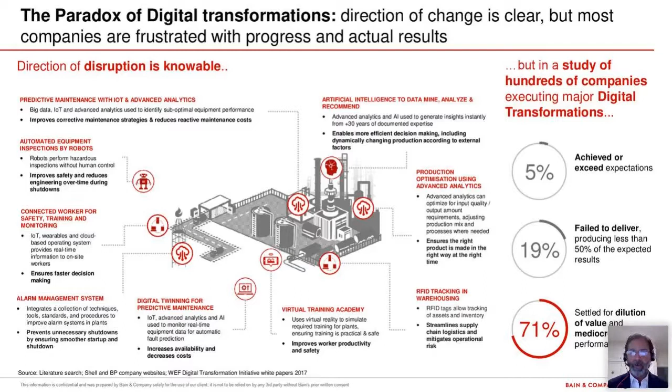But going now to digital transformations, I think the very important thing about digital transformations is the amount of frustration there is among the majority of users. Because when we look at what are the use cases, I think we've known the use cases and what could be applied to the downstream sector for more than 5 years. Right? Things like predictive maintenance, automation, digital twinning, all that. But when it comes to execution, the vast majority of digital transformations have generated a lot of frustration. And why is that? And what is different about the cases that we're going to see today?

I think that the key thing here is a lot of companies, as opposed to having a strategy enabled by digital, started a digital strategy. So it was about digital for digital, and embracing a number of use cases at the same time without a clear notion of a program. And that resulted in solutions that, for example, worked in one refinery but didn't work in another. All sorts of problems in relation to using all the data that was available, because they came in different formats and didn't interconnect and communicate with each other.

And the most successful digital transformations that we saw, this is an actual example for a client. The most successful ones were the ones that started with the company's business agenda. Right. So what was important for the company in terms of its leadership and differentiation in the sector, and specifically within the industrial and refining realm, it started from operational excellence. So striving to achieve operational excellence and knowing what was important inside operational excellence is slowly but surely embedding digital into that. So having digital as an enabler of operational excellence and best-in-class performance, eventually driving to full digital transformation, right?

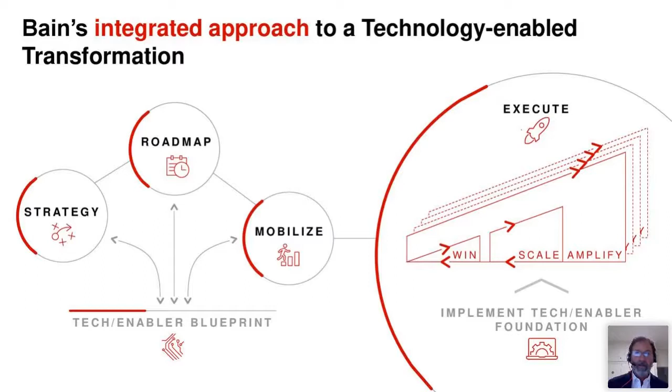So now I'll invite Ahmed Al-Zarani to talk a little bit about his experience in SATORP. Ahmed, floor is yours. Thank you, Josette. Thank you. Can we switch presentations here?

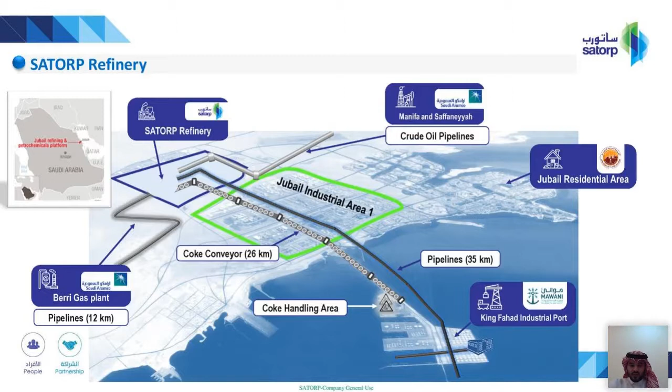So SATORP is a smart world-class refinery located in Jubail Industrial Area, Eastern Province of Saudi Arabia. It's a global partnership between Saudi Aramco and Total. SATORP is processing 460 kbd of heavy Arabian crude, full conversion integrated with petrochemical, high-value products complying with the most stringent international specifications. The SATORP complex contains more than 5,000 assets, 2,000 pipeline circuits, and 6,000 safety valves.

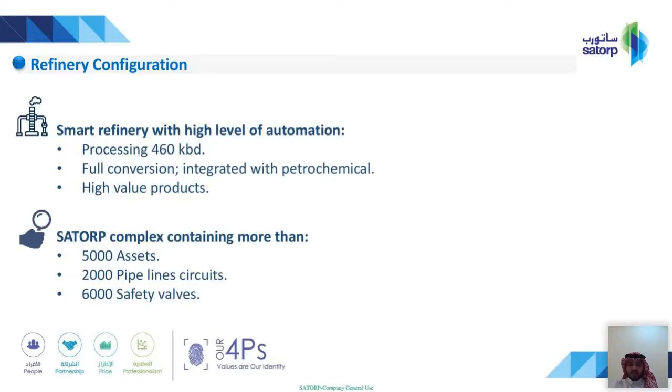SATORP digital transformation objectives are improving SATORP performance and agility to adapt to faster changes and sustain digital transformation, keeping SATORP an attractive and leading refinery. And the SATORP digital transformation guideline is to have full cyber governance. Digital transformation will contribute to improving employees and community, environment, health and safety, evaluation and growth, excellence and resilience, which is plant integrity, which we will discuss more in this presentation. It's the main body of this presentation.

Building the 3D platform: SATORP adopted digitalization since the construction phase, where all the construction engineering documents, 3D CAD systems, P&IDs, instrument data, drawings were submitted as digitalized documents, and this is what we call a golden opportunity to transfer it to one 3D asset virtualization platform. The beneficiaries of this platform are operations, HSSE, health, safety, security, and environment, maintenance, process engineering, and inspection.

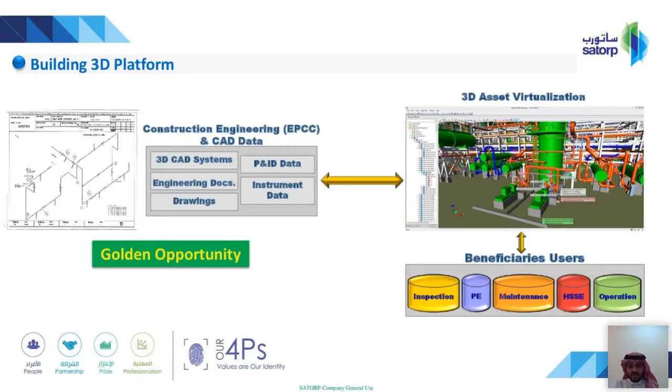Since my home department is inspection, I would like to give just an example of how we are using this platform. The first thing is the placement and managing of corrosion monitoring locations.

I think it's not working, so I will just go manually to the last slide. Sorry for that, I think it's not working here.

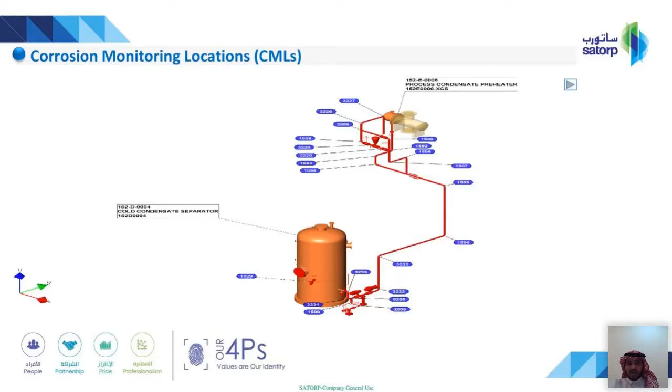So as you can see, this is a piping circuit, or what we call the corrosion loop, and this is the connected equipment. So this blue point or number is the CML, or what we call the corrosion monitoring location, where we take thickness frequently to monitor and see if there is any metal loss. So we are using this platform to identify all the thickness monitoring locations in all our corrosion loops and all our assets.

Sorry, again, the PowerPoint is not working, but I'll go quickly to the last slide.

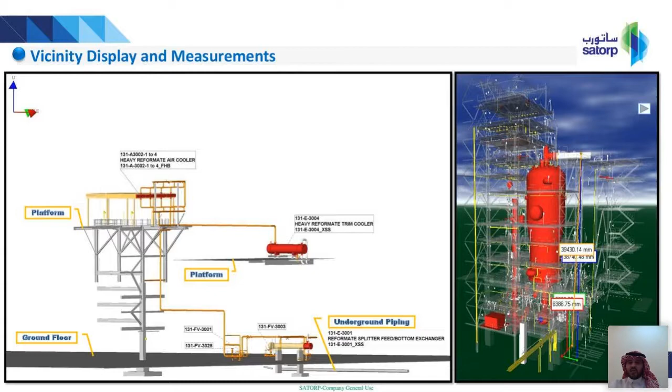So as you can see here, we also have the ability to overview all the assets and underground piping, even if the piping has insulation or not. We can also see the vicinity of the equipment. For example, if we have an inspection scope in a certain location on a nozzle, we will be able to identify how far it is from the ground level, whether there is any platform nearby, or whether we need, for example, support to get scaffolding or insulation removal.

So 3D laser scanning technology is nothing but converting an actual database of the assets and the plant configuration from the field data; we capture this field data to convert it to an active model. And this is what we call process digitalization. It's simply a mirror of reality.

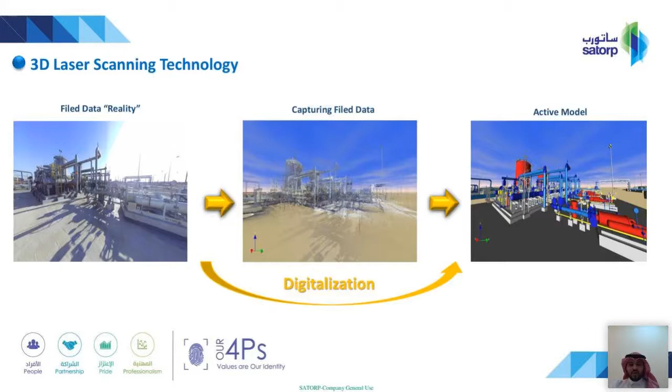Integration of the 3D scanning technology and fitness for service. But first, what is fitness for service? As a proactive measure and industry best practice, any critical findings or anticipated failures need to be addressed in order to evaluate and mitigate the risk. One of these measures is to conduct a fitness for service approach.

So recently, we faced two critical findings. The first one was a bulged regenerator. The challenge here was that the bulging area was all over the regenerator, not in a localized location. The second challenge we had is access, because not all areas have a platform, and as you can see, in some of the areas we have instrument connections or nozzles. And this leads to the incompetence of conventional techniques.

So, thinking out of the box, what we did is we made the 3D model, and we combined the 3D model of reality with the original 3D point cloud we have. After we combined them, we were able to compare and measure the length, width, and depth of the bulging area. These data are considered essential input for the fitness for service approach.

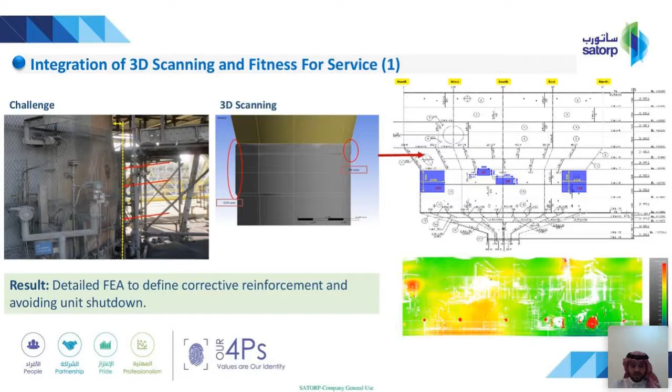Second case, it was about buckled piping. It's a 48-inch piping. The challenge we faced here to get a measurement of this buckle to go for fitness for service was the congested area. That led us not to go through a conventional technique of taking measurements. So we had to go through the 3D scanning technology, and as you can see here, we had a different section of the bulge location. The one in the green circle is the standard piping, and the one in white here is our current condition, where we'll be able to measure the ovality of the piping.

So this was during turnaround, and during turnaround or shutdowns, you need to have swift feedback, and you need to make a decision with quality and confidence, either to replace it or not. And after we go for fitness for service, with this approach, we will be able to take a decision to replace the line during the shutdown.

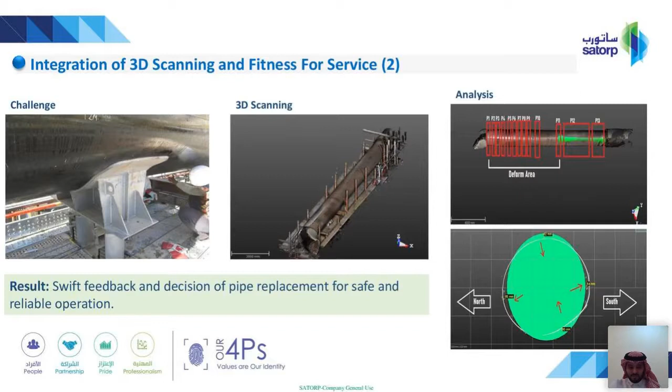The utilization of digitalized technologies will improve the asset evaluation. It will increase the plant integrity. And this point, as I just showed you, where we were able to evaluate the condition of the regenerator and the 48-inch pipe and other cases as well. In this case, also you will optimize your inspection monitoring cost, because you will have a specific location where you will take, for example, thickness measurement locations with the CMLs. It will give you an overall view of your corrosion loop and assets, and not necessarily to go, for example, to scan the full corrosion loop, as well as effective document communications.

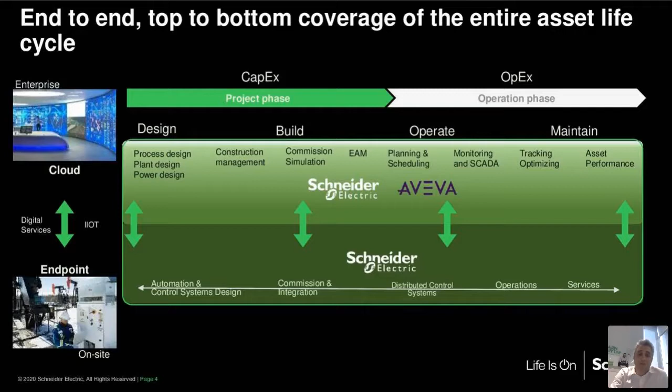Once I've spoken about these silos and integrations, let's take a further zoom on an asset, or look at this distillation unit, or its digital twin. On one side, we have the process automation and control systems connected to different transmitters, driving the performance of the unit or the overall asset. On the other side, we have the power system, which energizes all the actuators, be it pumps, motors, or other units.

Both are closely related, because the process drives decisions on the speed of the motor, on the flow, on the torque needed, etc. But yet, when we design a project, when we implement a project, the power and process disciplines remain quite separate. We strongly believe that to reach the next level of efficiency and unveil further synergies, the oil and gas industry needs to break the silo and integrate power and process more, because they cannot be looked at separately.

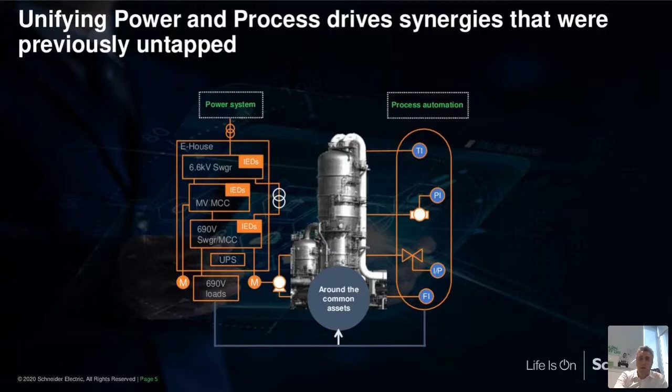Once we've looked at this, we'd be mainly addressing five areas of benefit coming from the integration of power and process. We won't be looking at them separately. Will the best CapEx drive the most optimized OpEx for an asset? Or if I design the most optimized OpEx, am I sure to drive an acceptable CapEx for my company? Or should I be looking more towards my total expenditure cost, and what areas would I like to drive through the integration of power and process?

And these areas can be summarized into 5 buckets, I would say. The first bucket the industry has to look at is how to maximize the efficiency around capital projects.

By unifying the process models and the plant models life cycle into a digital environment, and Ahmed has touched on part of this through his digitization example, the industry is capable to mitigate the investment risk and drive a more efficient capital cost by driving reductions up to 20%. By looking at asset reliability and performance, the industry would look at increasing the uptime and ensuring that no unplanned shutdowns are occurring or hitting the production.

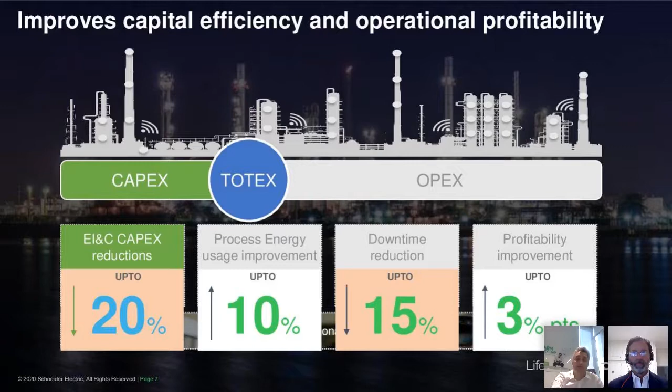I would like to pause here, and I see that the animation is not working. That's a well-loaded slide in my opinion.

But in order to drive performance today, we have streamlined 8 integrated power and process strategies, ranging from unified engineering asset information, so how to digitize information, how an end-to-end integration of conceptual feed, detailed design into an overall environment that handles process simulation, engineering, 1D, 2D, 3D, from one single data hub with bidirectional information flow, how multidisciplinary teams can collaborate in real time, and how do we create the data model for the digital twin with a single version of the truth.

And that is not only on the engineering side, that is not only creating a digital twin on the asset performance side, but how do I make my digital twin alive across the full life cycle of my asset, from feasibility to operations and maintenance.

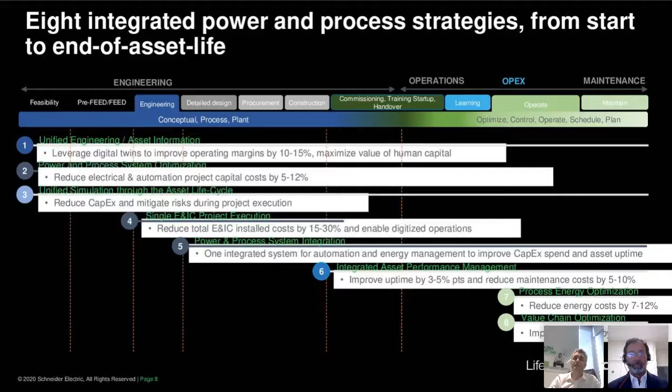The second areas are around optimizing the different electrical and control architectures. They are about running a unified simulation across the life cycle to optimize what can be done on startup, early detection of faults, of issues, and making sure that we have no hurdles while commissioning and executing a project.

Looking at integrating more and more the power and process systems. We all know that a lot of interfaces exist between both disciplines. And when we discuss about disciplines and gateways, we run into a lot of discussions about data conversion, the same version of the truth, communication, etc.

So how do we make these two systems talk and operate in a seamless manner while implementing from design and asset performance management strategy, digitizing your assets, digitizing your rotating equipment, your electrical assets, etc., and driving a collaboration center and an expertise center to consult on potential issues on your assets.

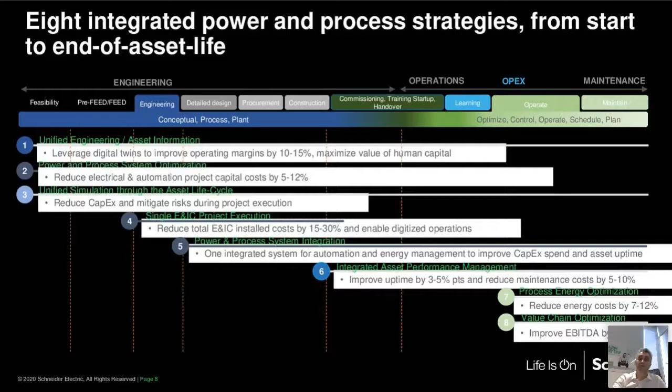Last but not least, I've touched base already on this. The two last elements are around driving energy costs down by looking at energy optimization for the process and improving the value chain of an existing asset.

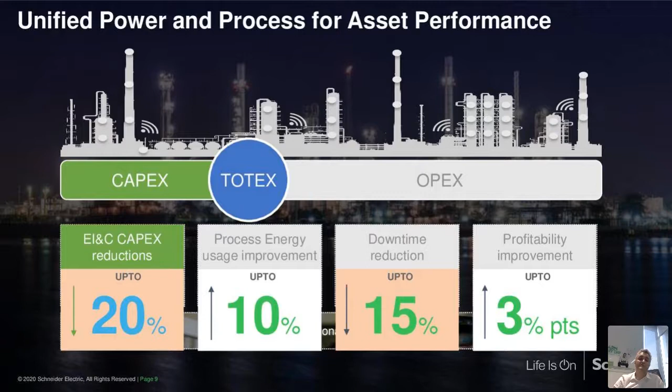So what I would conclude with is we can drive efficiency and performance, but not by doing better the things we already did. If we are looking to tap into the next level of efficiency, if we are looking at transforming the business models that we have to make sure we tap into more synergies and better profitability, we need to break some of the most important silos we have across our businesses to enable collaboration and drive the performance of the overall organization. Thank you.

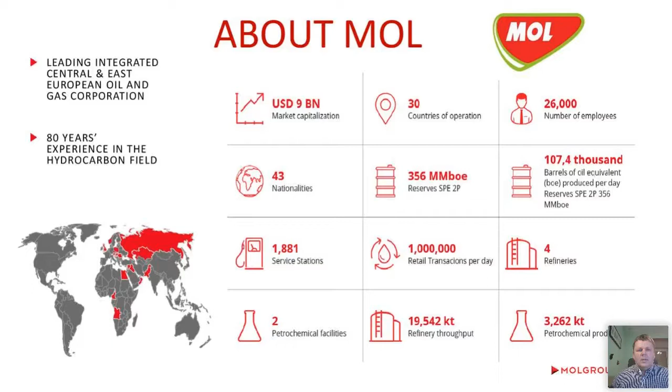First of all, some numbers about MOL. MOL is an integrated oil and gas company, headquartered in Budapest in Central Europe, strong in upstream, midstream, and downstream. I'm arriving from the downstream area, in a refinery site from Hungary. MOL operates 4 refineries and 2 petrochemical sites in the Central European region: 1 refinery and 1 petrochemical site in Hungary, 1 petrochemical and refinery in Slovakia, and 2 refineries in Croatia. In the new strategy, we try to increase petrochemical capacity, and we would like to upgrade the refinery assets.

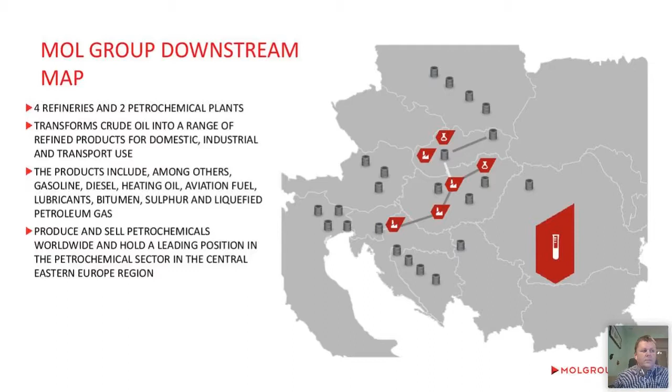How can we provide better petrochemicals? In process information and automation, digital transformation is very important. How can we improve automation and digitalization technology? And very important, how can we set up the new organization structure which can support this layer structure?

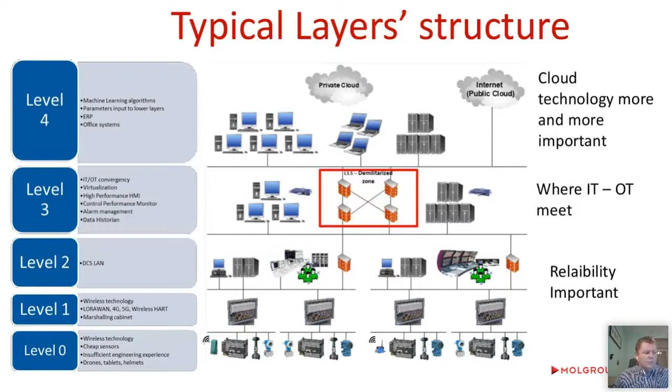So what are the new opportunities and challenges in layer 0? In the refinery, we use robust industrial sensors and control systems, mainly for hard-wired diagnostics, to operate the refinery assets in the plant. But nowadays, new IoT technology is very important. How can we harvest new data using IT technology and big data technology for diagnostic systems? It's important to implement new IoT elements, usually with wireless flexibility, which provide this data lake technology via cloud services.

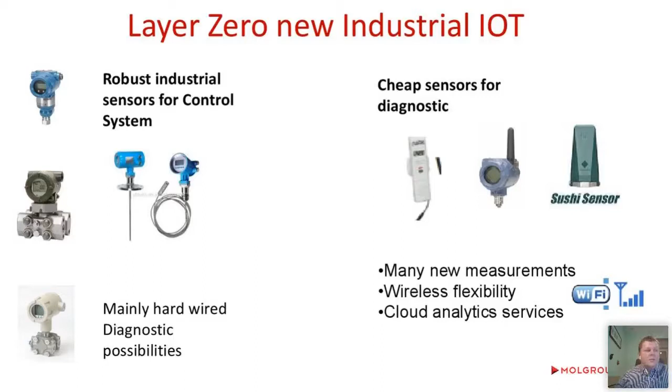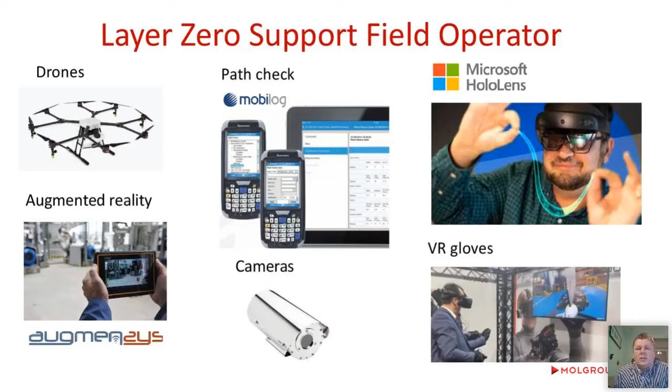And at layer 0, it's very important how we support field operators. For field operators, we can support new technologies, for example drone technology, augmented reality, new VR gloves, helmets, HoloLens technology, and of course checking route paths with mobile technology, mobile assets, tablets, and mobile phones. Also very important is new camera technology for checking the most important assets and checking for technology problems and anomalies.

The first layer is the field-to-control-room connection: standard transmitters, usually the pneumatic standard or 4-20 milliamp connection, hard-wired technology, foundation fieldbus technology. It's an absolutely robust technology to support operation. How can we improve data harvesting in this technology, especially diagnostics? How can we check and connect IIoT elements? It's difficult to choose which is the better technology for refinery and petrochemical sites.

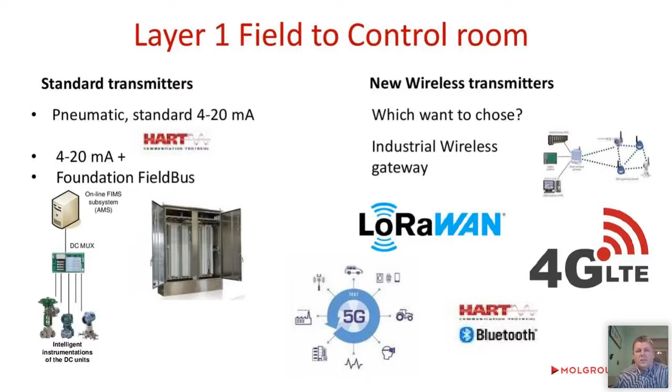And very important, how can we standardize this globally at MOL Group level? Which is the best technology? LoRaWAN technologies in the refinery, HART Bluetooth technology, 4G, 5G. There are many opportunities, and sometimes it's very difficult to choose which is the best way, and how we can standardize these technologies.

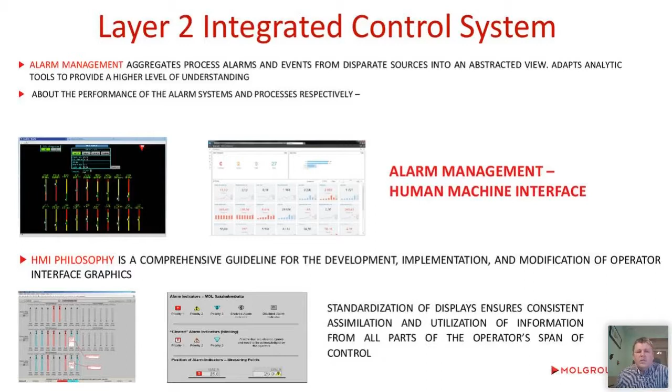The second layer is the integrated control system, the DCS and ESD system. It's very important how we improve operator effectiveness at this layer. The most important challenge is alarm management: how can we improve alarms, and how can we analyze alarm behaviors? Also very important are the human-machine interfaces at this level. How can we improve operator effectiveness with high-performance human-machine interfaces, and how can we create an HMI philosophy in a global way?

Very important too is training for operators. We would like well-trained operators in the refinery for stable operation of the refinery and petrochemicals. The most important thing here is the operator training simulator system; we implemented high fidelity for many units inside the refinery and petrochemical site.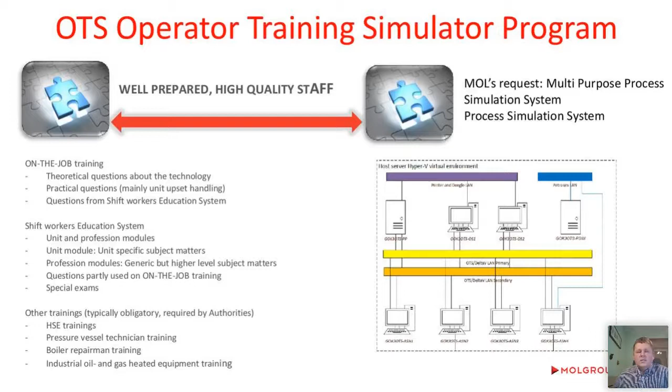So it's very important things. Layer three, the operation technology. It includes many elements. Nowadays, very important: how can we improve the cybersecurity of these industrial assets? So not only the cloud and normal IT office assets; most important, the cybersecurity in the industrial.

Very important, the effectiveness and energy increasing, the advanced process control. Very important, the corrosion and the process safety management support with corrosion. How can we check the interlock status? Very important, the control loop tuning and control loop monitoring system, energy monitoring system with many dashboards, and also very important, the maintenance. How can we improve the predictive

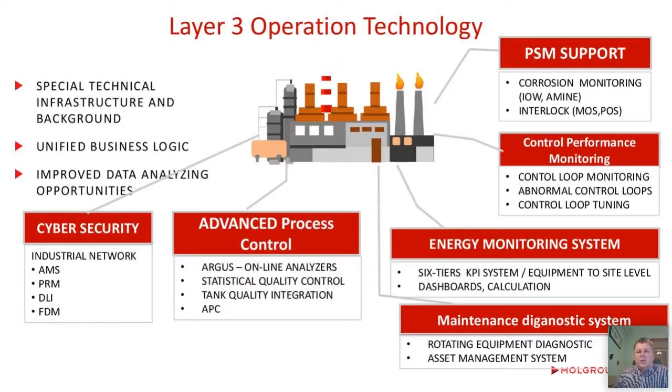maintenance inside these assets? And as I mentioned, a very important layer is the demilitarized zone between layer 3 and layer 4. So it's a bidirectional communication between industrial and office network, and very important, the collaboration between IT and OT. Sometimes the collaboration is very good, sometimes very difficult.

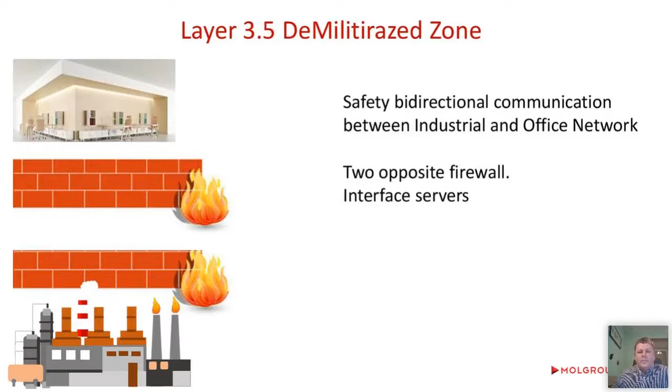And layer 4 is the manufacturing execution system, usually operated by the automation people and operation technology, but the normal operation, for example, the operating system, server side, database side, is on the IT side. For example, the new advanced analytics system, the data historian, we are using the OSIsoft PI system, laboratory information system, and very important, tracking the loss management and the data reconciliation, the Sigmafine system.

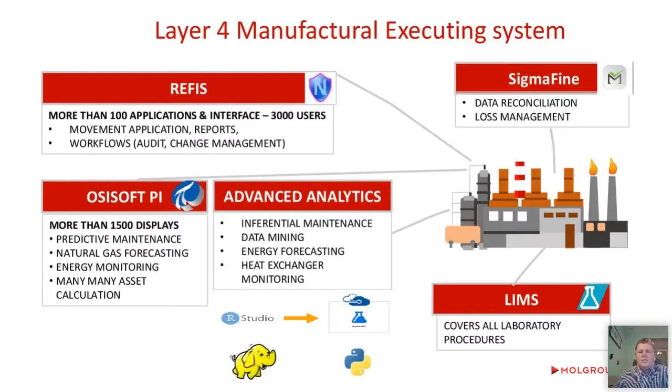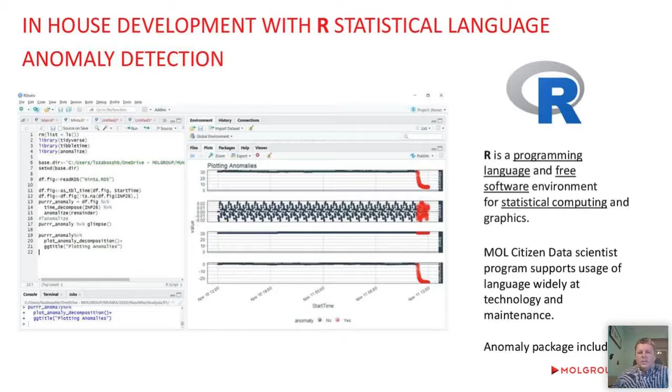And very important, also in-house development in the new way or statistical way. Very important to improve the engineer knowledge with statistical way. We are using many in-house development applications in R technology and other technology, for example, Python technology and more analytics technology.

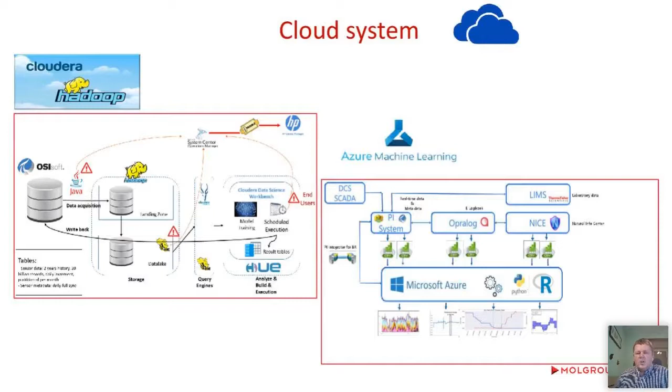And how can we connect this data to cloud systems? Very important, the data lake strategy in MOL Group. At this time we're running two data lakes in parallel. One data lake is the Cloudera Hadoop data lake, which we are using usually for the retail system, and for the downstream system we are using the Azure machine learning system and Azure components which connect the refinery information system.

So there are big challenges and big opportunities layer by layer, and very important for digital transformation. So set up these components, set up the organization strategy, harmonize these organization layers, and challenge the new organization. Thank you very much.